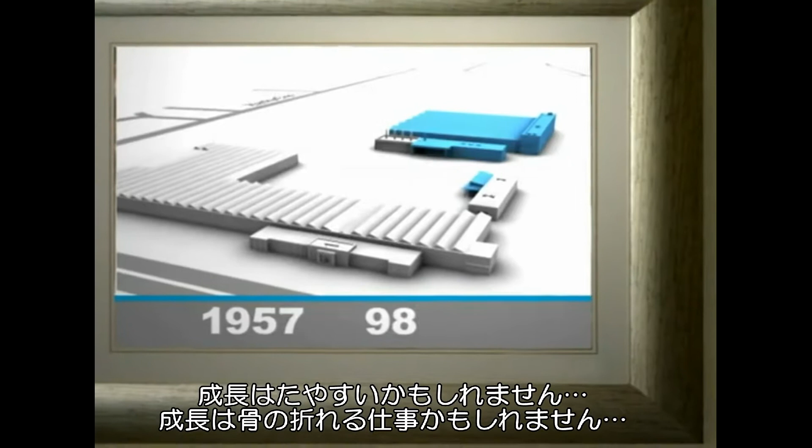Growth can come naturally. Growth can be hard work. Growth can create a whole new outlook.

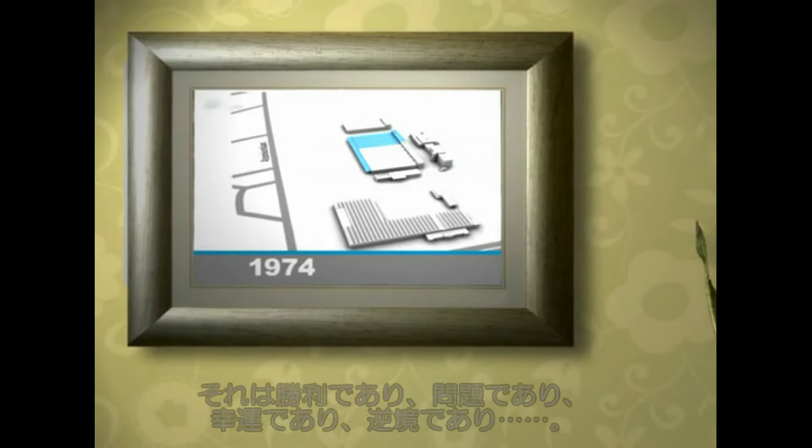Growth is a story, and like every story, it should contain a bit of everything: triumphs, problems, good fortune, adversity. The growth story of 50 years of Atlas Copco in Antwerp, Belgium is no different. But what makes it a success story are the constants throughout it: interaction, commitment, and innovation. These values have made it a story we're proud of.

The prologue to our story starts in 1937, when the compressor factory, Arpic Engineering, is founded in Antwerp. After the Second World War, there's an enormous demand for construction equipment, and Arpic Engineering soon has to look for more space. In 1946, it moves to the Boomse Steenweg in Wilrijk near Antwerp.

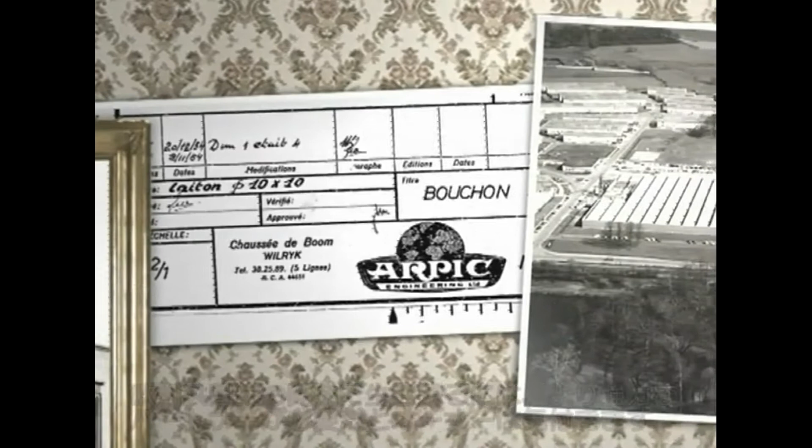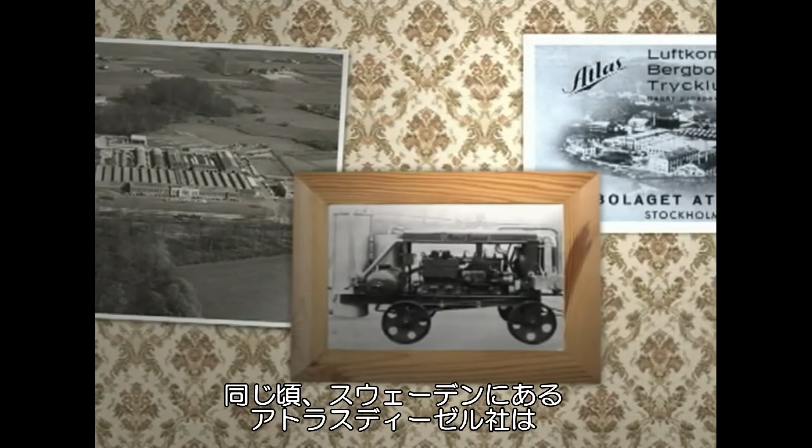Business is going well, but around the middle of the 50s, the owners realize they need a stronger partner to survive in the developing European community. At the same time in Sweden, Atlas Diesel AB has sold its diesel engine business in order to focus completely on compressed air and related equipment.

In 1956, the company changes its name to Atlas Copco AB and acquires Arpic Engineering. In 1967, Atlas Copco moves all of its compressor activities from Stockholm to Wilrijk and rebaptizes Arpic Engineering to Atlas Copco Airpower NV the year after. It's the beginning of our story.

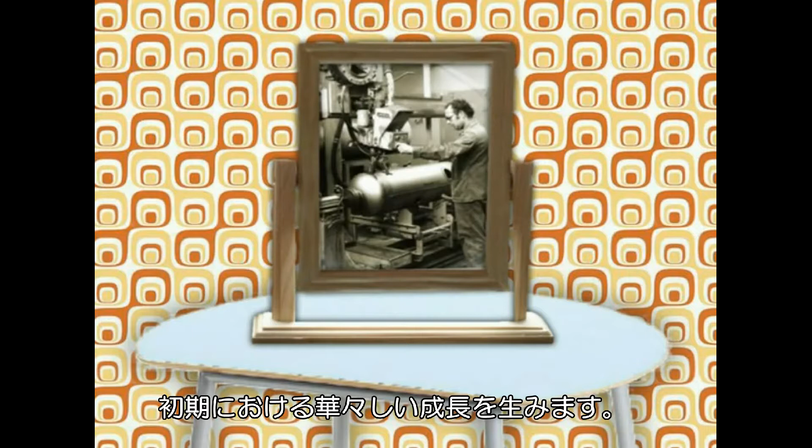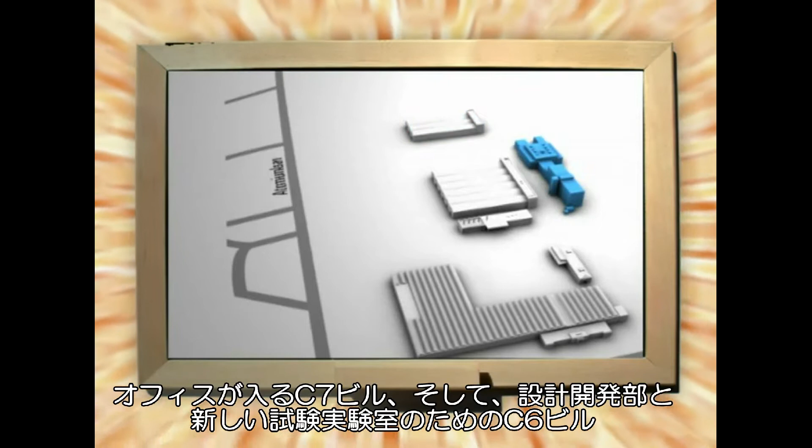The mix of Swedish management know-how and Belgian work ethics sparks off a spectacular growth in those early years. 1969 sees the completion of several construction works: the C7 building for offices, the C6 building for the Design and Development Department, and a new testing laboratory. With the infrastructure, the number of employees grows accordingly.

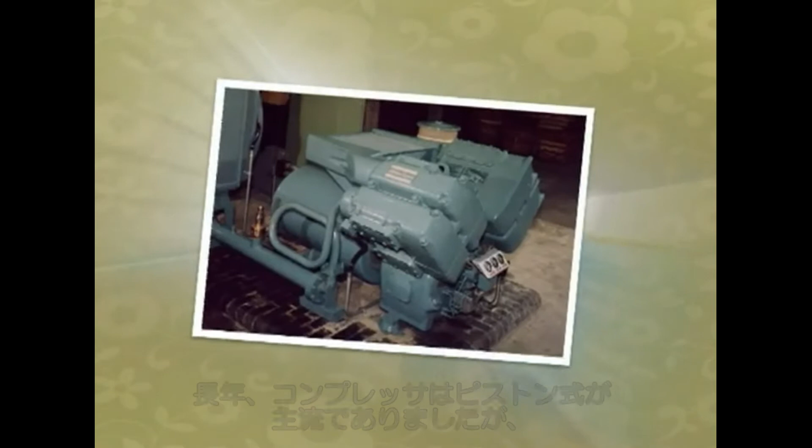While the piston type has been the compressor of choice for years, Airpower now plays a key role in the rapid development of a new compression technology, the rotary screw compressor. In 1968, the release of the oil-free Z screw compressor brings a quantum leap in compactness and vibration-free operation.

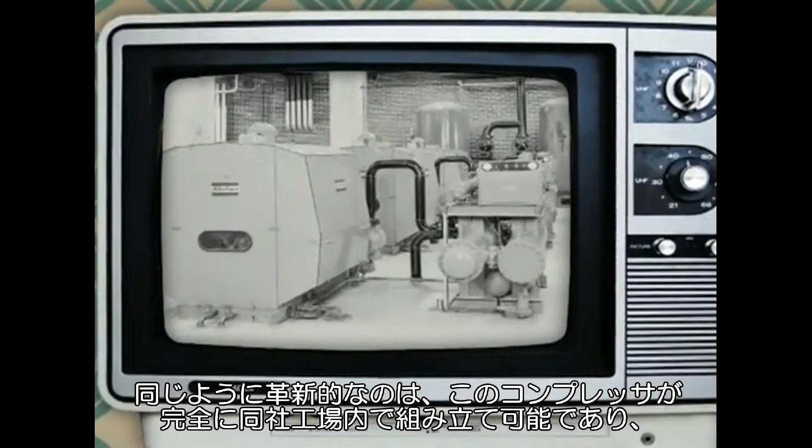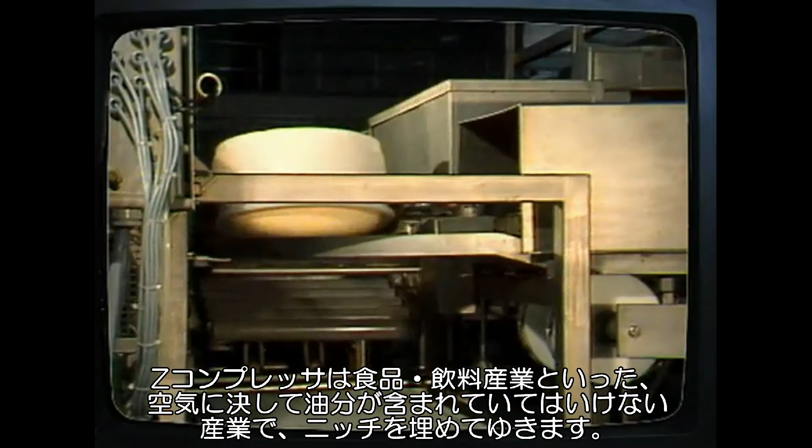Equally innovative is the fact that this compressor can be assembled entirely within the factory and delivered to the customer ready to start. The Z compressor fills a niche in industries that require guaranteed oil-free air, such as the food and beverage industry. It also enables the development of new compressed air applications, like air-jet textile weaving. Mobile compressors like the PT benefit from the compactness and vibration-free operation of the oil-free screw.

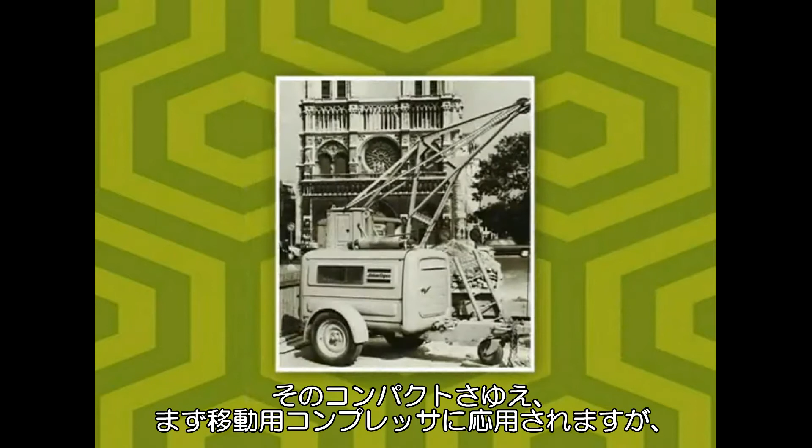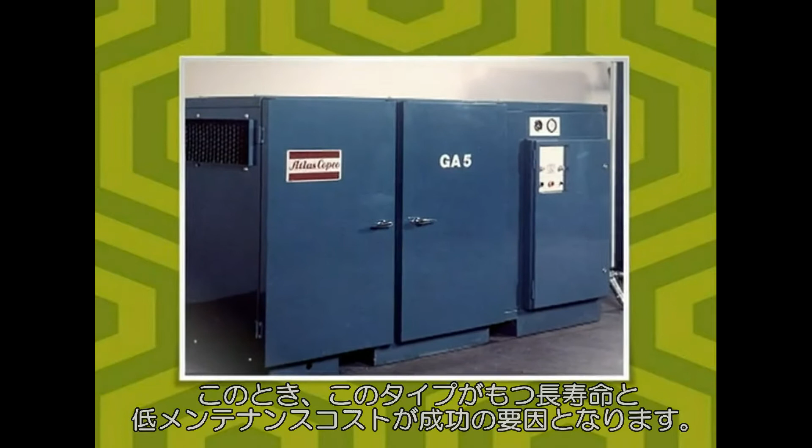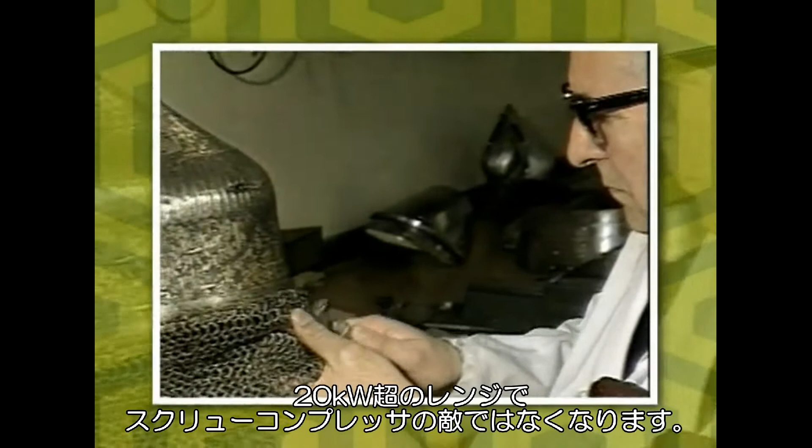After the oil-free version, the oil-injected screw compressor enters the market. Because of its compactness, it's first applied in mobile compressors, but later also in stationary industrial compressors. Here, its long life and low maintenance cost are the main reason for its success. In an extremely short period of time, screw technology dramatically changes the market. By 1980, the industrial piston compressor can no longer compete with the screw compressor in the range above 20 kilowatts.

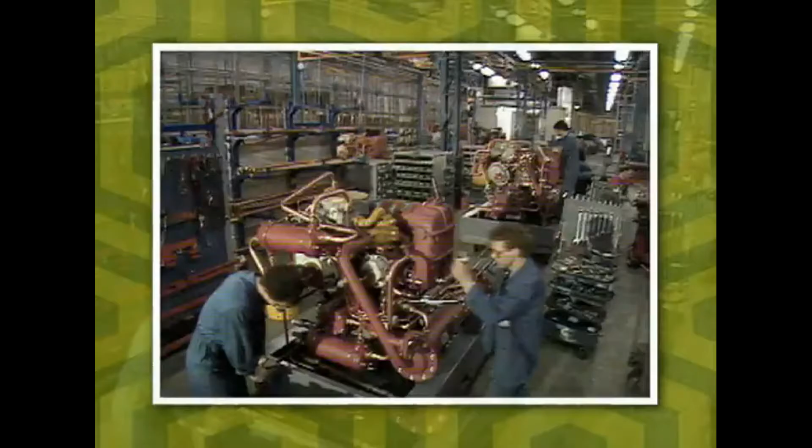Despite the turbulent economic environment in the second half of the 70s, air power continues to grow. It owes this to a large extent to its star range, the oil-free Z-screw compressor. With a major phase of product innovation behind it, Air Power moves on to improve production efficiency by transforming its vertically integrated factory to a horizontally organized assembly plant.

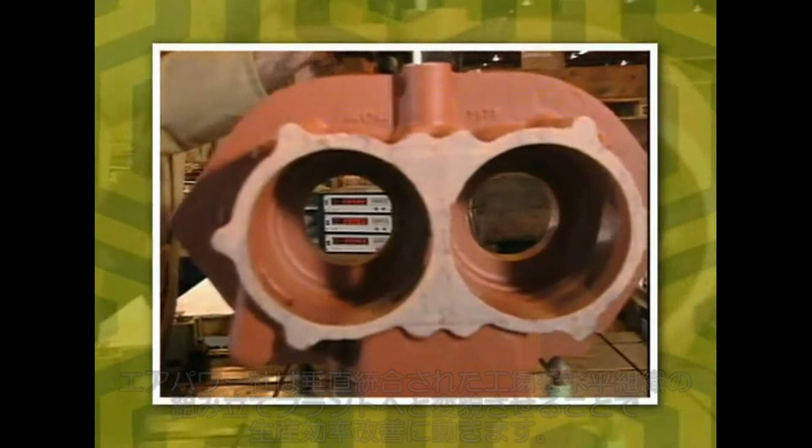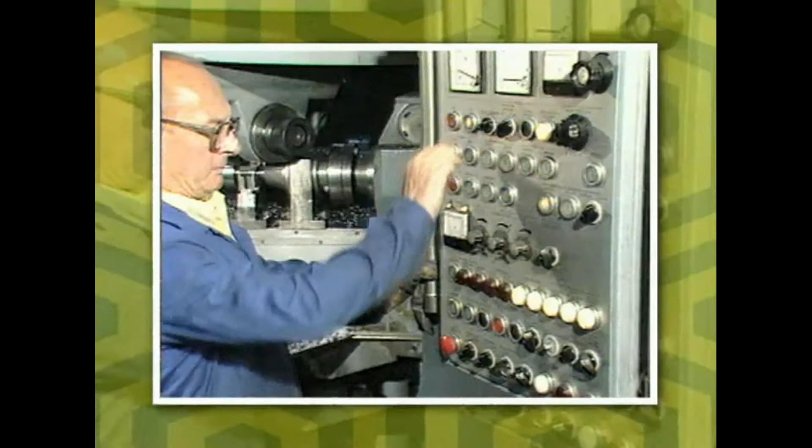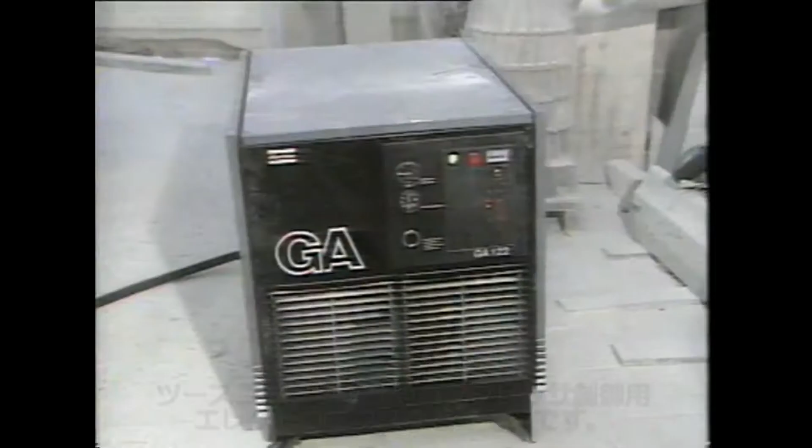All sheet metal manufacturing is outsourced and a fully automatic warehouse is built. Manufacturing is concentrated on the core components, screw elements and coolers for the Z compressors. A clearer business focus paves the way for new innovations like the tooth compressor and electronics for compressor control.

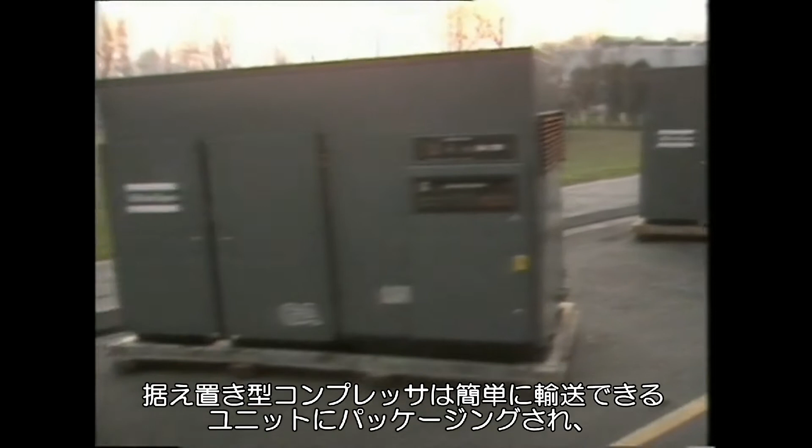Another tendency is the drive towards more compact, silent and integrated equipment. Stationary compressors are packaged into easily transportable units, containing all the functions needed for operation, ready to start and equipped with a silencing canopy.

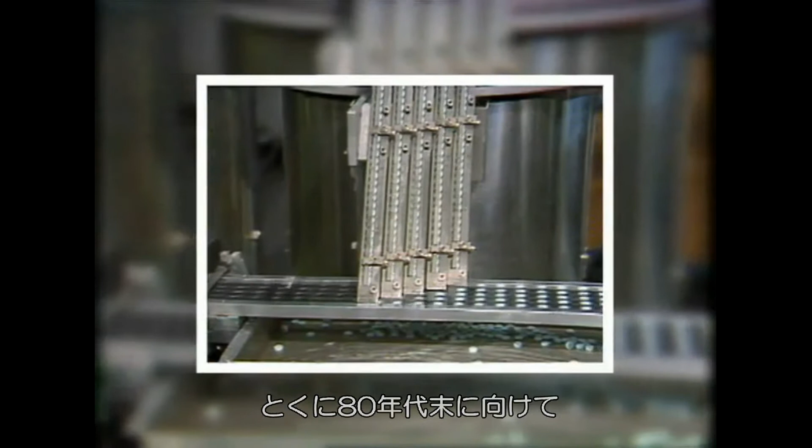In the 80s, compressed air seems to be a source of energy on the decline, but innovation manages to turn the tide. Especially towards the end of the decade, new applications make sure compressed air is there to stay. Compressed air is becoming an active part of manufacturing processes and a source for its constituting gases,

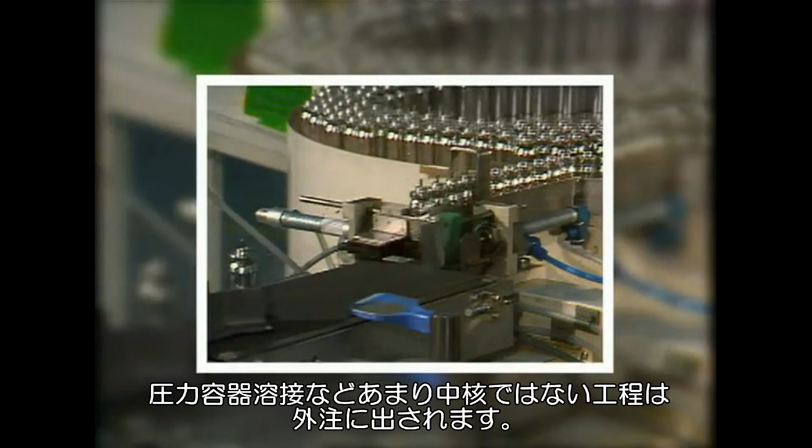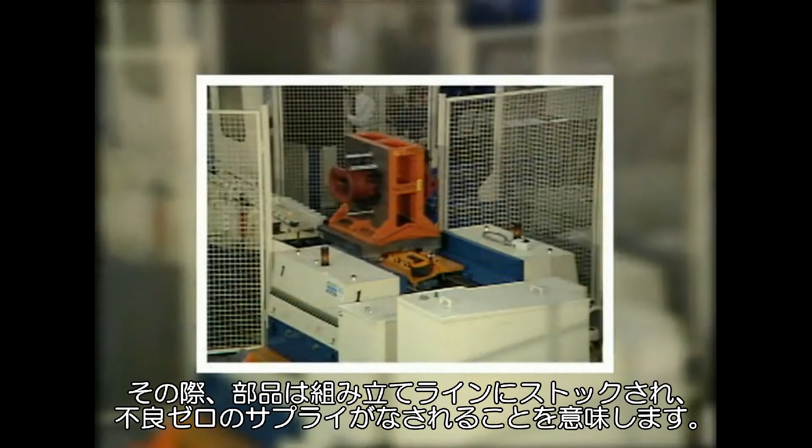mainly nitrogen and oxygen. More non-core activities such as pressure vessel welding are outsourced. The concepts of lean manufacturing are initiated. This means equipment is assembled to order with short lead times, parts stocking at the assembly line, and zero-defect supplies.

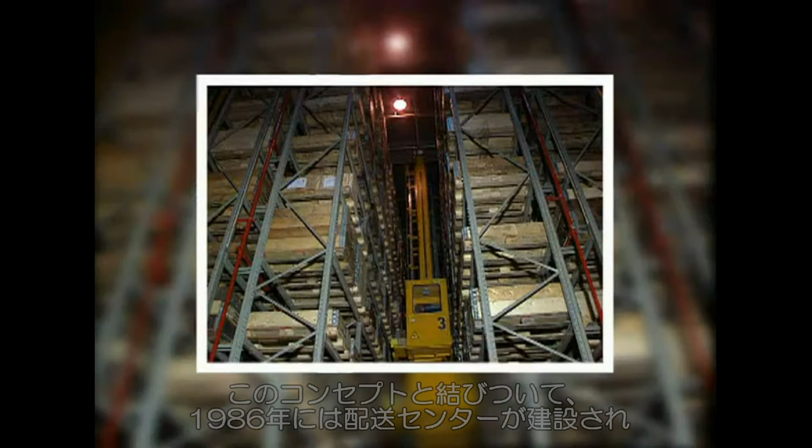Linked to this concept is the building of the distribution center in 1986 and the introduction of the direct daily delivery system. Having one central warehouse guarantees the delivery of parts anywhere in Europe within 24 hours.

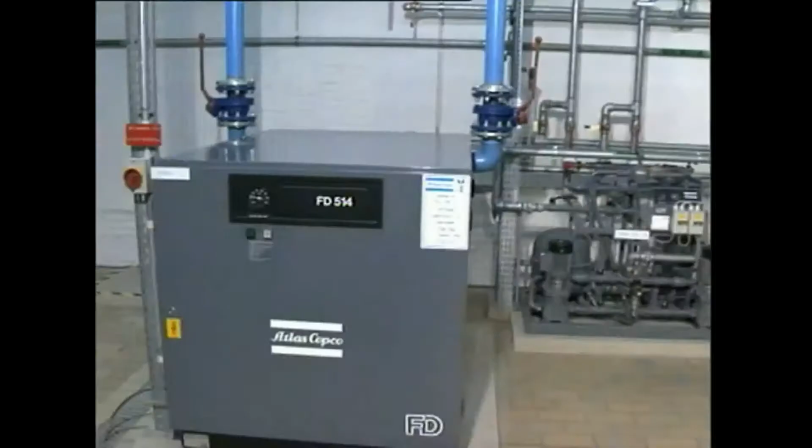The product portfolio is expanded with compressed air dryers, the extension of the oil-injected screw compressor range below 11 kilowatts, and the first electric power generators. Oil-free screw and tooth compressors continue to grow in the upcoming active air and air separation applications.

By 1990, a firm belief in the future of compressed air has been re-established. To cope with the challenges for the future, the entire Atlas Copco group is restructured. Air Power is reorganized in 4 independent divisions.

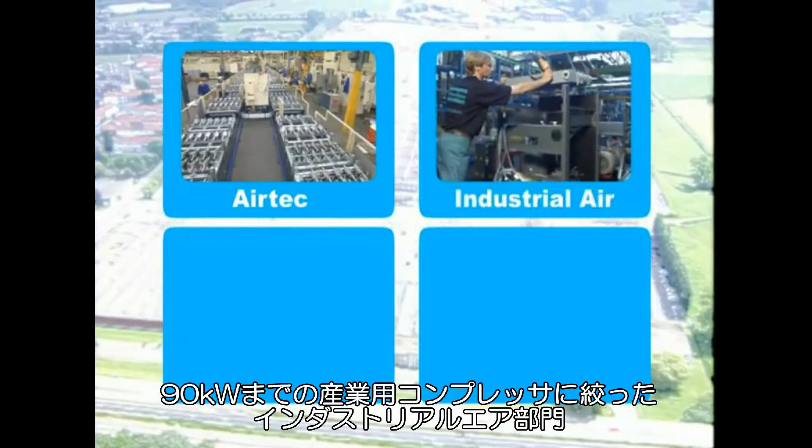Airtec, for the core component development and manufacturing. Industrial Air, focused on industrial compressors up to 90 kilowatts. Oil-free Air, producing large oil-free compressors. And Portable Air, specialized in transportable compressors and electric power generators.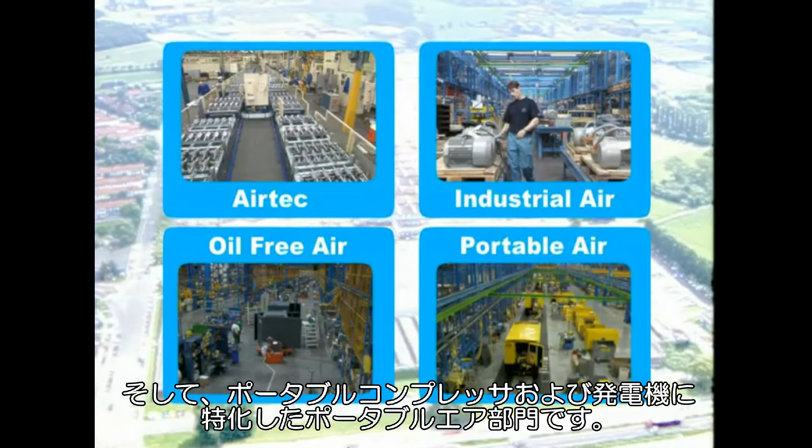New buildings are constructed to cope with increasing demand. A hall for element assembly and a factory for the assembly of mobile compressors and electric power generators, the so-called yellow plant.

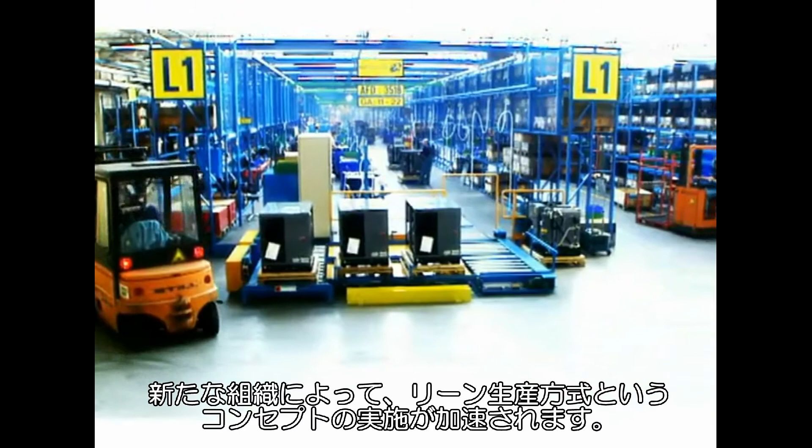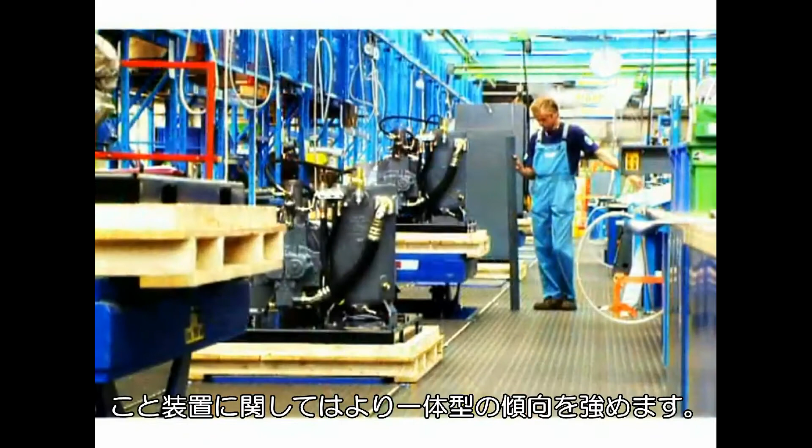The new organization speeds up the implementation of the lean manufacturing concepts. Air Power completes its U-turn from building for stock to building to order. The equipment also becomes more inclusive. Compressor packages are being equipped with integrated dryers, filters, electronic drains, and condensate treatment.

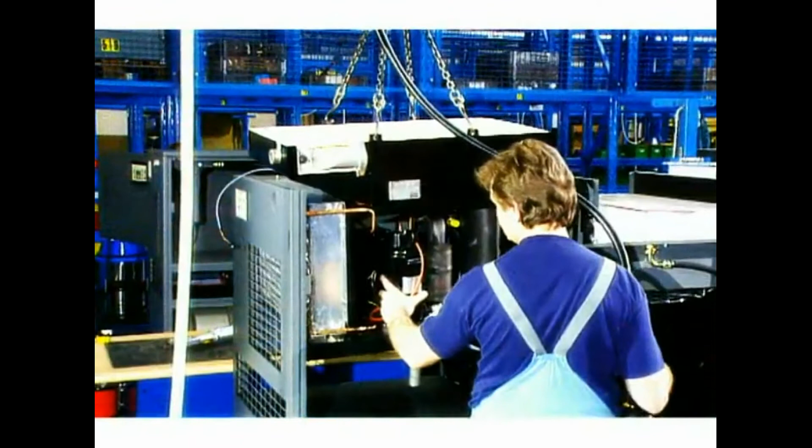The 90s show a shift of emphasis to the quality of the air. To meet that need, the Quality Air concept, with a dedicated organization and a full range of products, is launched.

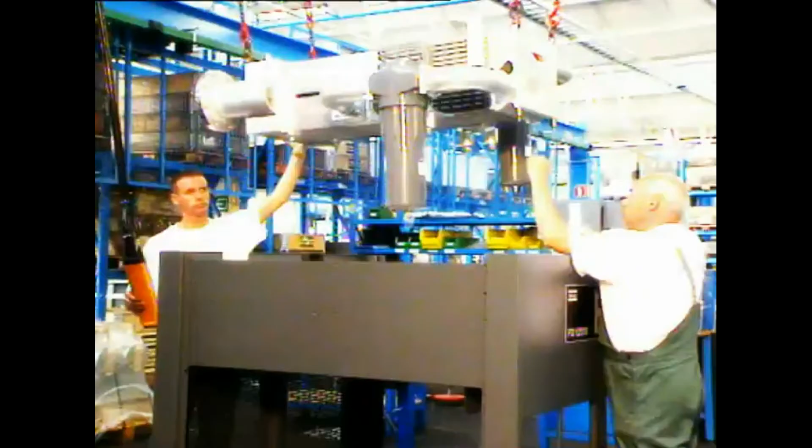In 1994, Atlas Copco is the very first compressor manufacturer to introduce the VSD, a variable speed-driven stationary compressor that saves up to 35% of energy compared to the traditional fixed-speed compressor.

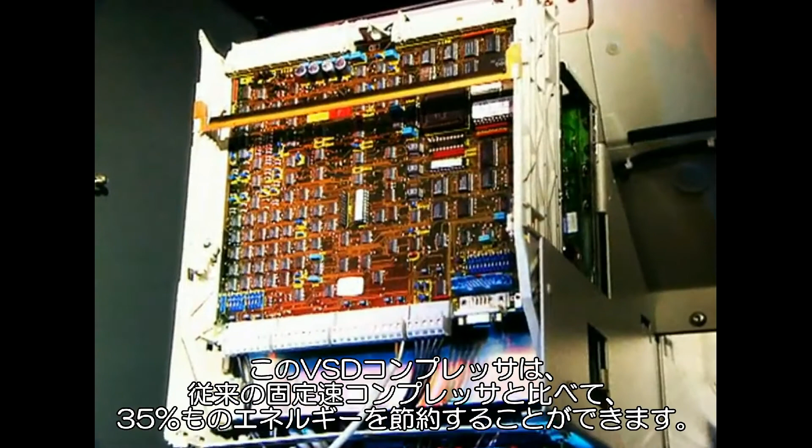The very first turbo compressor, the ZH, follows in 1995. This model is specifically designed for very large constant load applications.

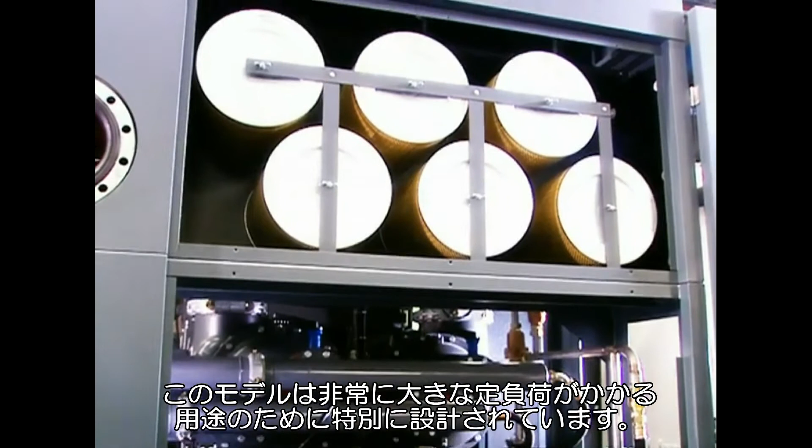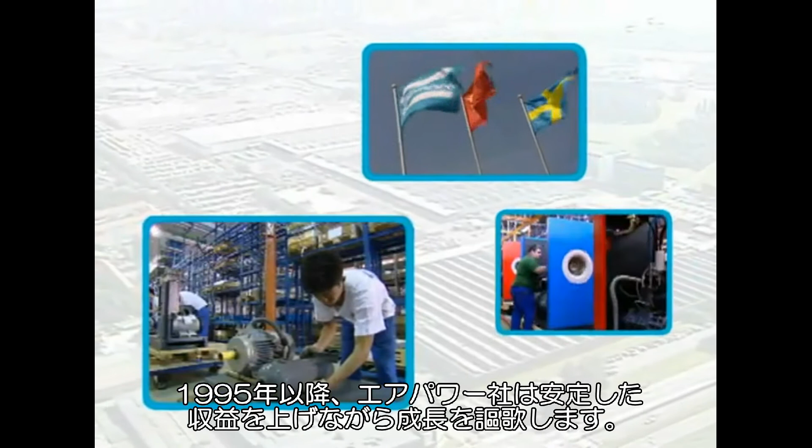From 1995 onwards, Air Power enjoys years of stable, profitable growth. The former local producer is now truly becoming a global market leader.

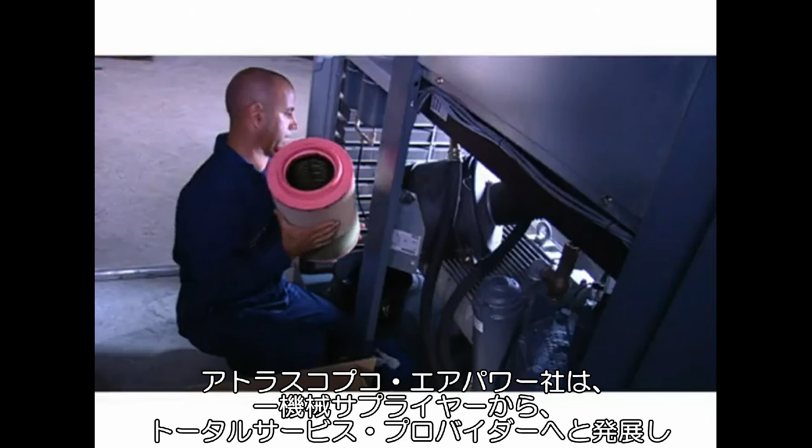From a machine supplier, Atlas Copco Air Power develops into a total service provider, with aftermarket support, offering service contracts as well as compressed air system auditing and consulting.

Today, Air Power is by far the largest single industrial compressor plant in the world. From a noisy, vibrating piece of equipment, compressors have evolved into a highly innovative technology, protected by a continuous flow of patents.

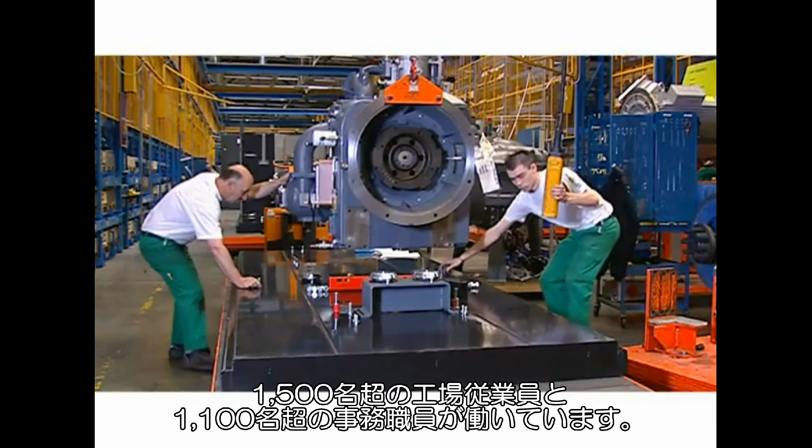Atlas Copco Air Power is by a margin the #1 company in Belgium when it comes to patent filing. Air Power is one of the larger employers in Belgium, with over 1,500 blue-collar workers and more than 1,100 white-collars. Every year, 70 young engineers are recruited.

We see new applications for compressed air popping up every day, and the competitive race never stops. The strength of Atlas Copco Air Power is its ability to adapt to change and to stay in the forefront of innovation and technical development.

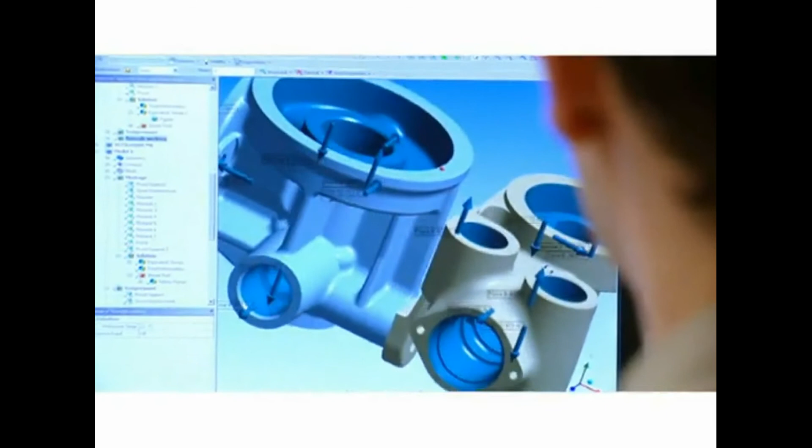There is always a better way. We've managed to find that better way in the last 50 years. But our story doesn't end here. Thanks to our commitment, interaction, and innovation, we intend to keep on finding better ways of doing things.